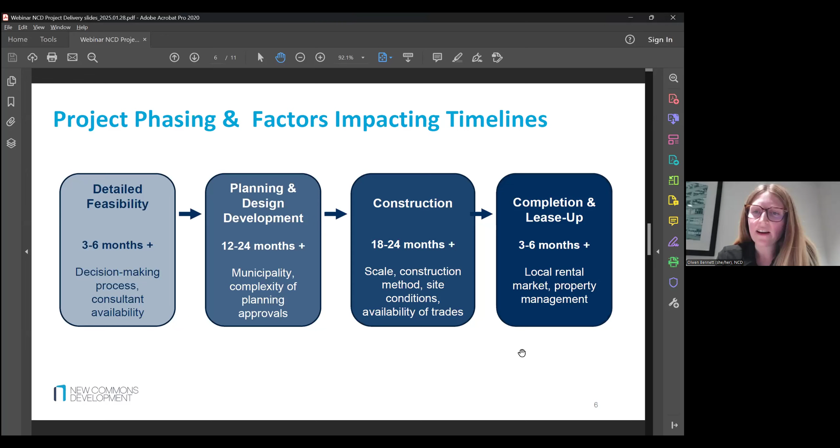And then during the last phase here, the completion and lease up, some factors that might impact timing could be your local rental market, or your property management company, your municipality also if you're looking into rent supplements and other operating subsidies.

Okay, so I'll go into a bit more detail on each of these phases. So in this early phase, this is what I call detailed feasibility, but it's really when you have made that decision to try to make a project move forward. So at this point, you've already established that you would like to try to make a project move, and you're basically getting more and more detailed on your project goals and your vision.

You're starting to narrow down on key risks and getting more detailed on that project viability. So that's working through your pro forma modeling and testing some of your assumptions. And this is probably also when you're applying for pre-development sources.

Some of those sources that Maya mentioned can help cover some of these early costs. Some groups may have some cash equity in the bank that they could put towards this early phase just to keep things moving, but that's not really common with nonprofits.

As a really high level estimated cost for this phase, we put about $50,000 to $100,000. The type of activities you'd expect here would be your early concept design, likely paying for a project manager or a development consultant. And this is also when you're hoping to do some site due diligence studies.

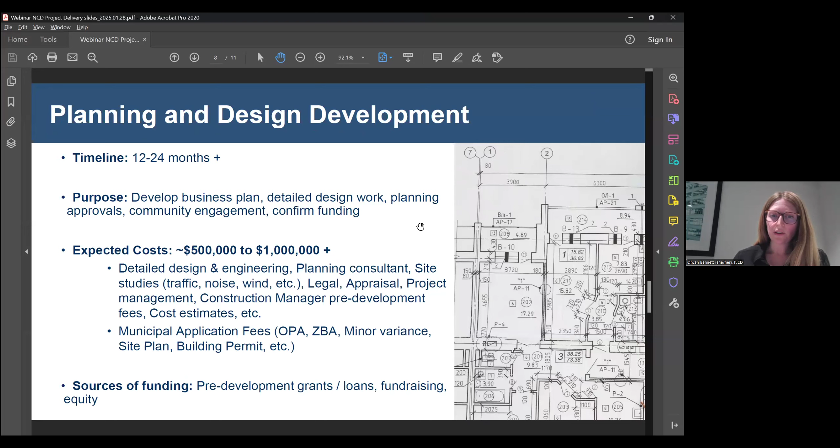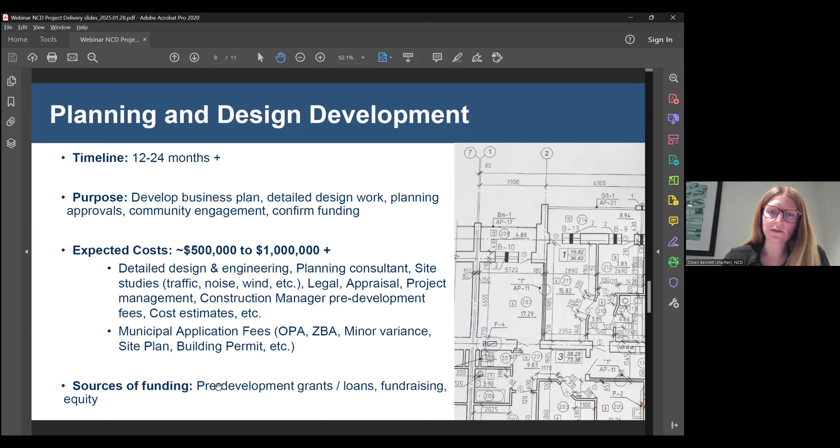And then in some municipalities, you may also have municipal application fees, which can be quite substantial. Some cities and towns will waive these for nonprofits doing affordable housing. So it's always good to look into that before you pay any fees to your municipality, to see if you can get it waived. So again, these sources of funding include pre-development grants and loans, fundraising, and equity to get you through to the construction phase.

So construction, the timeline here is 18 to 24 months plus, but actually it could be shorter or longer depending on the scale and scope of your project. There are certainly some really good ways to shorten your construction timeline, which I know Lee will talk about.

So this is really the time when you've closed on your financing, so you've got all your capital sources stacked up and ready to go, and you've signed a contract with your construction manager and you're getting your building built.

So of course the costs really depend on the design and the scale of the building, but this will include your hard costs, as Naama was talking about. So this is the actual materials and labor for the building itself, fees for your construction manager or contractor, any development charges if applicable, although Ontario now waives development charges for nonprofits, which is great. You are also going to be paying your architect, quantity surveyor, various consultants throughout construction, insurance, financing costs, and other consultants as needed. So yeah, quite a few costs at this stage.

And this is really of course when your costs ramp up quickly, but you've got all your sources stacked up and ready, so that's all good.

So let's kick off the part about planning and designing. I'm an architect and urban planner. Unlike Olwen and Maya, you will also reach out to me at a pretty early stage, but we don't cover the entire development. We do the architecture and planning part of it.

When I put this together, I reached out to other speakers. I really thought of the audience as other nonprofits that I got to work with, and I was very happy to see that this was a much more diverse audience, including a lot of developers and municipal teams. That made me very happy.

I wanted to share some of the thoughts behind the scenes. When I was thinking of what I want to say, it's less about the traditional process - yes, you will need a building permit, but all buildings do. I wanted to think about the difference between traditional market housing and when I work with nonprofits, because I sit on the board of Kehila, which is an affordable housing organization. For almost 10 years now, I've volunteered with different organizations for advocacy, so I understand nonprofit housing from a different perspective, not just as the architect.

When I was trying to really think what I could say today that will be valuable to you, I thought of three aspects that would make nonprofit housing different than market housing: the land use planning aspect, the building code things you should know, and your users. These are the three main buckets.

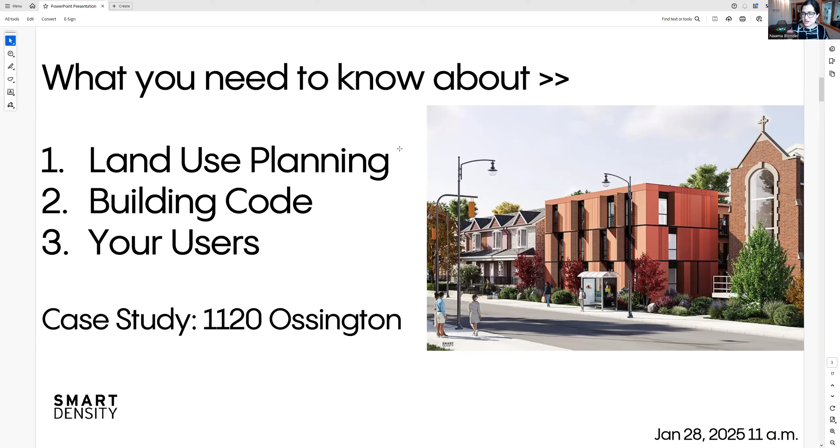You'll see me using my 1120 Ossington project as an example, a building that this week is getting occupancy, and I'm super excited about it. So I'll tell you more about it.

On the land use planning aspect, I was trying to imagine nonprofit organizations trying to navigate this process. If you're operating in a specific city, which is most of the time the case, I'd really recommend - this is Toronto, and this is the land use map. I've been reached by nonprofits in the past with different land opportunities, but the expectations of what the land allows from an official plan perspective and policy perspective, and what the city planning directs for growth and what type of growth, had a very big gap.

So if you're a nonprofit working in the same municipality you operate in, I'd highly recommend just becoming high-level familiar with the land use map. There's only one map to know, and you should be able to look at a property on the land use map. For example, here in Toronto, if I was the head of a nonprofit trying to get new housing built, you need to know two colors: basically yellow and pink or orange. If it's in the yellow, your development potential is very limited - you won't be able to get more than 4 stories most of the time. Now the city has some allowance to 6 stories, but overall that yellow is true across Canada.

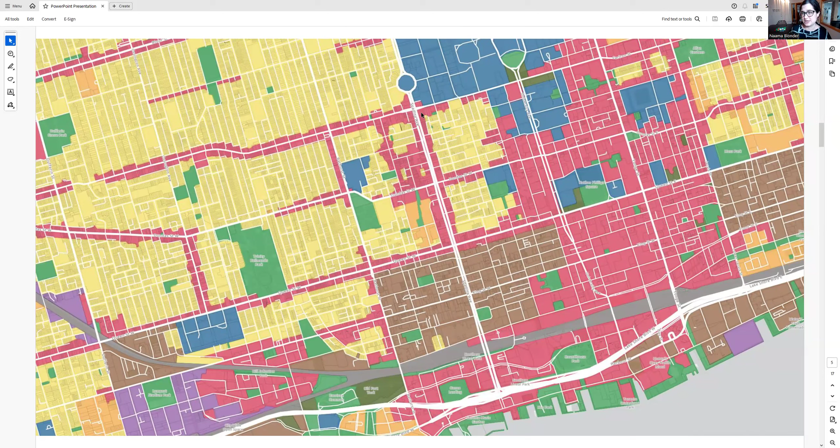Or the pink, which allows for more high density. Even if you reach out to a planner in the city - and I do believe they will be open to that - you can ask for a 10 minute explanation of what those colors mean in your municipality, and you'll be able to rapidly evaluate. I'm not talking about square footage or height, but at least if you have a vision for a mid-rise building, and I know some of you do, but you keep looking at land that will not accommodate anything more than a single family house, you're really wasting your time. So this would be one aspect of the process.

And while I'm talking about land use planning, I saw a lot of you are from municipal teams, which made me very happy, and I understand where it's coming from.

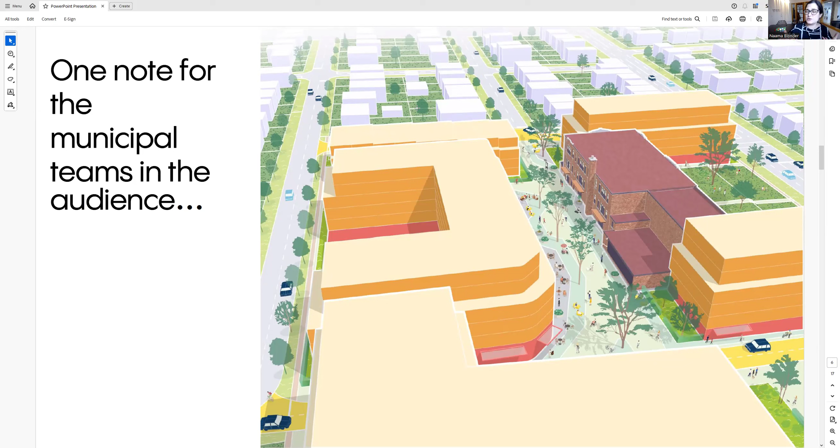I wanted to share about one request, kind of a side anecdote. I've been reviewing in the last year a lot of RFPs coming from municipalities releasing land. This is work we did for the region of Durham, about to be released. They hired us to come up with a community needs assessment, alternatives to the site, and we got the site rezoned. I've seen different ways municipalities are doing it. Once you work with nonprofits, the highest and best use of the site is not necessarily what they will build eventually, because of cost, low-hanging fruit, or whatever reasons. Not doing the work in advance, zoning the site, and just opening it to the wild west of applications means you get a wider spectrum than anticipated, and you're wasting the time of the nonprofits. I've seen it on both sides.

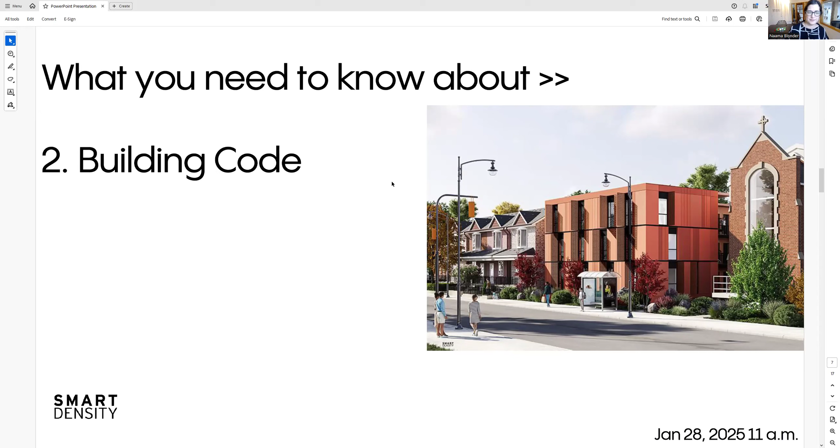Coming back to my second consideration for getting nonprofit housing built: the building code. The Ontario Building Code, giving you a very simplified version, has Part 9, which is simple, and Part 3, which is complex. The trigger between Part 9 and Part 3 is when the building is more than 3 stories in height above grade. So 3 stories and a half basement is still Part 9, but 4 stories above grade is Part 3. Also the building area, the footprint, exceeding 600 square meters, triggers Part 3.

I'm saying this because switching from Part 9 to Part 3 will have a lot of implications on your cost, from fire safety, accessibility requirements, to HVAC, mechanical and electrical systems. As I said, if I work with private sector developers, the highest and best use of the site, meaning the maximum density achievable, is most likely what the private sector developer will be after. When I work with nonprofits, from my experience, it's not always the case.

First of all, not always can they serve the tenants - if a building comes in with 100 units, not always do they have the ability and capacity to serve 100 new tenants. Or for different costing reasons, they might not be able to get the funding. So in the case of 1120 Ossington, fairly quickly we understood that the building should be under Part 9, which we designed to be 3 stories and slab on grade, to also make the construction much simpler.

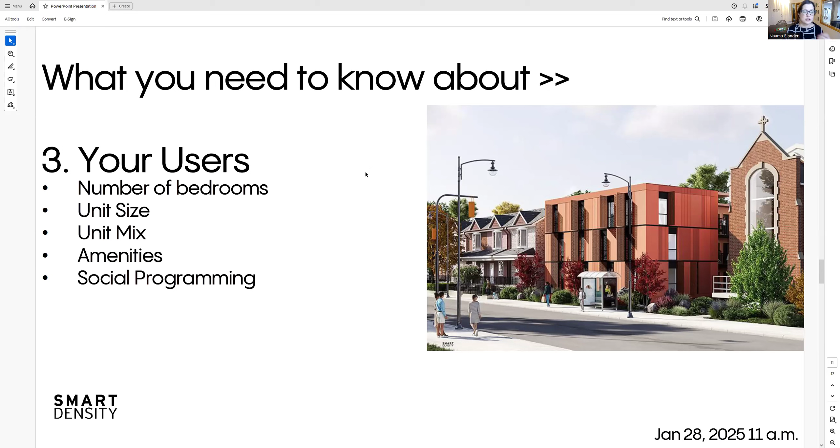Also the social programming and amenities, if you need them. So I wanted to walk you through what we have in 1120 Ossington, which is - remember I told you a few slides ago - the color, the land use designation of this property is yellow. I already know this is not going to be a fully mid-rise building, no matter even if the site was larger. I specifically didn't go into the dimensions of the site because I'm assuming that you, as an organization, will look for larger properties.

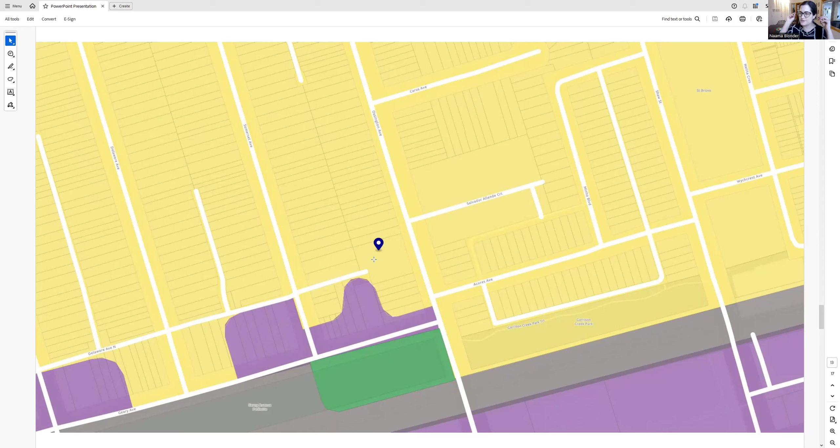So you already see, just from knowing the color, that this will be limited in height. It will need to be more in a low-rise scale.

The other thing I wanted to show you is that we had an existing building on the site. This church was already converted to affordable housing over 10 years ago, and we had an infill opportunity. This is a huge thing for nonprofits - look right under your nose. You might own land already that has surface parking or surplus land that you're just not using properly. This infill, yes, it was tight - it was a little piece of grass and some surface parking that introduced the opportunity for this infill.

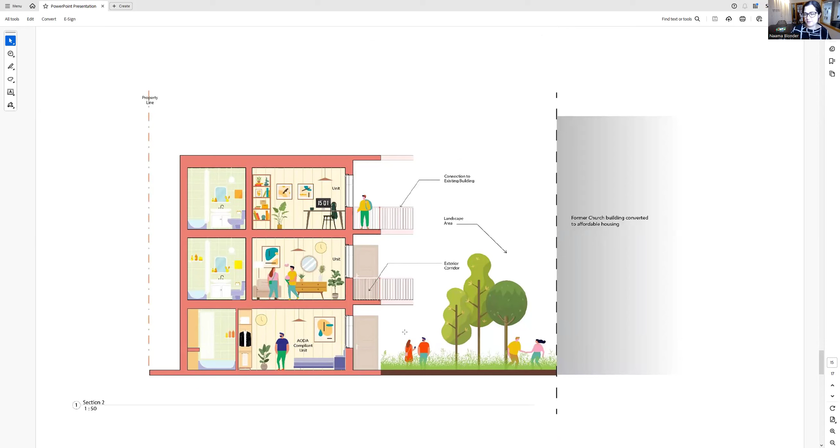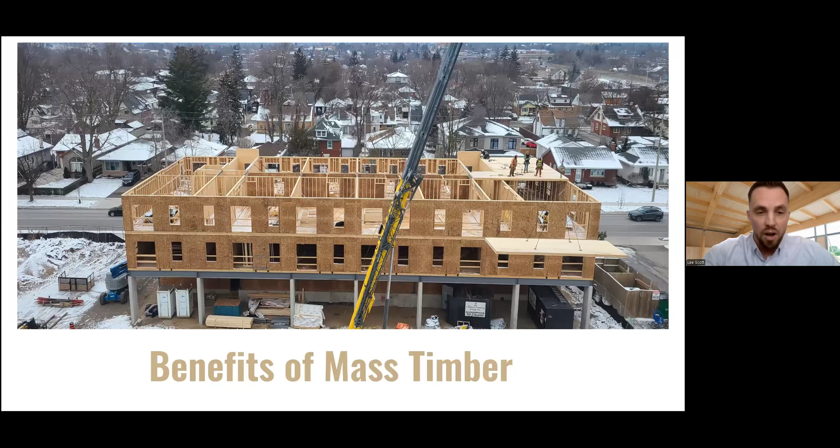The carbon equation is also a very important part of the mass timber offering for sustainability, because mass timber sequesters carbon, and it's also less carbon intensive to harvest trees and get them to site to produce the building than using concrete or steel. We're able to promote a sustainable product here, typically between 25 and 50% less embodied carbon than a conventional building.

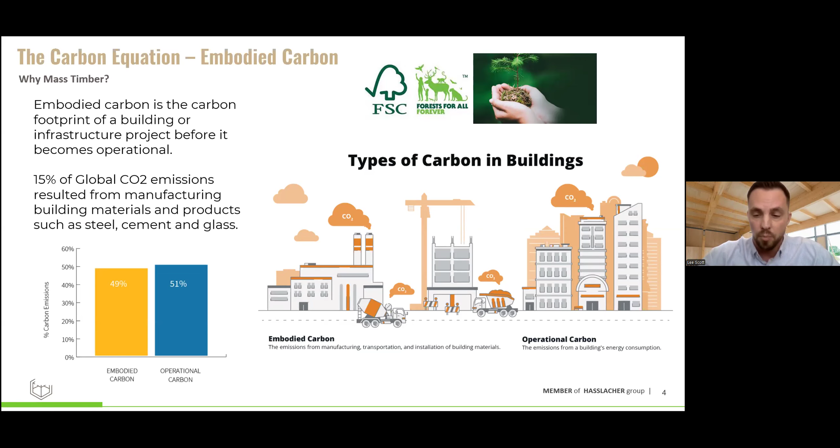The strength to weight ratio of wood is also quite advantageous. We're able to build buildings with less foundations, so less concrete in the foundations. We're able to build taller sometimes on geotechnical site classes that wouldn't sustain a concrete building. That implies less soil remediation needed and increased seismic performance.

We're also able to add stories to existing buildings. This is a great example we just completed in Peel region, where we added 2 stories to an existing concrete building. I think that's something we'll try to utilize more and more as it comes up.

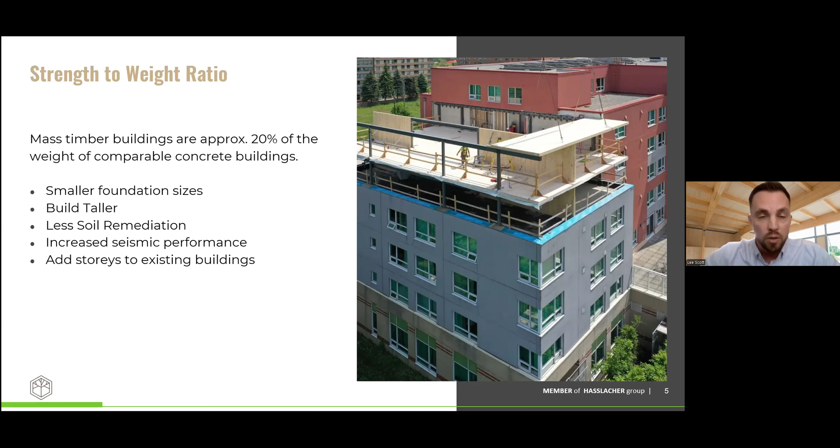Probably one of the most tangible benefits of mass timber is saving on the construction schedule. If we're planning these projects properly, as site work is going on and concrete foundations are being done, we're actually manufacturing the building offsite in our facility - basically building a digital twin of the project right down to the last screw. All the mechanical, electrical, plumbing penetrations are coordinated beforehand and cut in our factory, so trades get to site with less decisions made on site, less site instructions, less RFIs, a little less bureaucracy, and are able to fit out the building extremely quickly.

There's also a lot less formwork and shoring. It's a very clean and quiet site, which enables the trades to get in there very quickly and fit out the building. Obviously, there's less interior finishes as well.

If you're leaving the wood exposed, that's a huge benefit for less drywall and other finishing crews on site, which take time. Those overall construction savings translate into interest savings. They translate into generating revenue quicker when you're getting the building leased up and your tenants in there quicker. Less general condition expenses for the site, and you've got less equipment rentals.

So you're not just looking at material costs when you're comparing mass timber to other approaches. You really have to look at the project holistically and add up all of those additional savings to get a true value of what the mass timber project is costing compared to other approaches.

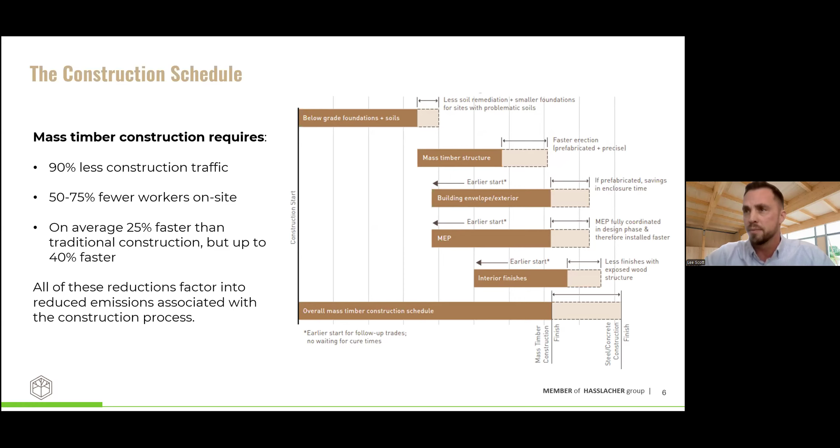So Element 5, we are located in St. Thomas, Ontario. We have an office downtown Toronto, but our manufacturing facility is down in St. Thomas. When we started, we broke ground on this in 2019. It's a 140,000 square foot facility. We have 2 fully automated production lines in the facility, one for CLT. We make about 50,000 cubic meters of CLT per year, which translates into about 2 million square feet of floor plate when utilizing a 5-ply standard CLT floor plate.

Our glulam production, which complements CLT quite well for a mass timber offering, was on the lesser side, about 5,000 cubic meters. That actually pushed us to either buy off the market or work with some European manufacturers.

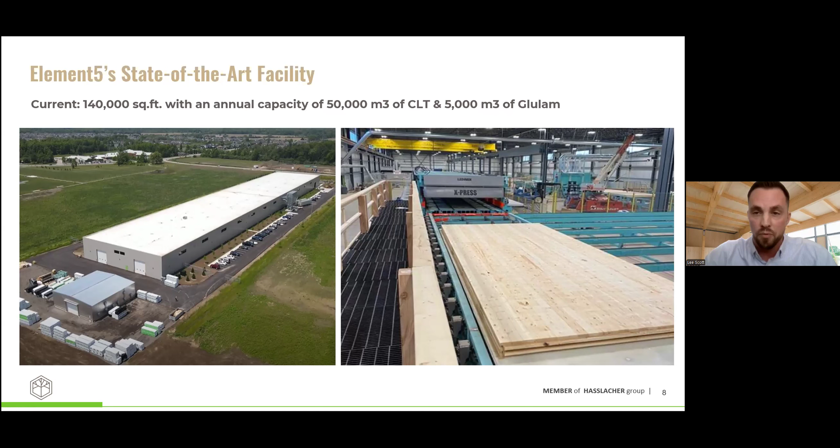So that developed a relationship with Hasslacher. Hasslacher is an Austrian firm, a family-based company started in 1904, highly regarded as one of the best mass timber manufacturers in the world. They have 14 factories over in Europe, and they've made a significant investment in Element 5 for our expansion that is going on right now.

So we're taking our current 140,000 square foot facility and we've added significant square footage to it. We're putting a mass timber office on the front. We're adding additional areas for CNC, so that's actually cutting up the panels and the glulam beams that we're making. Some extra room for shipping, and we've added a lumber grading and sorting facility that you see there in the back.

It's about a 50,000 square foot building. It'll just be taking the commodity lumber that we get from our mills and sorting it and regrading it to get more utility out of the lumber that we're getting. Hopefully that translates into cost savings for our customers.

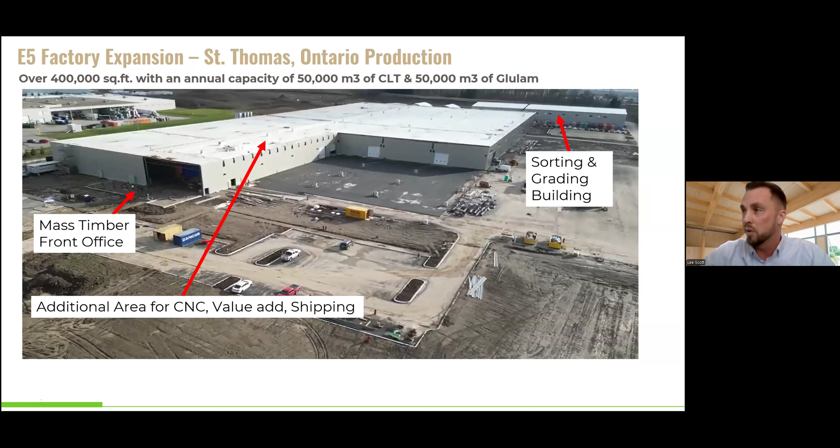And we've added a new glulam line, taking our glulam production from about 5,000 cubic meters per year to 50,000 cubic meters per year. So a very highly evolved, high volume, high capacity glulam line going in right now, and we're going to be making some of those glulam beams very shortly here.

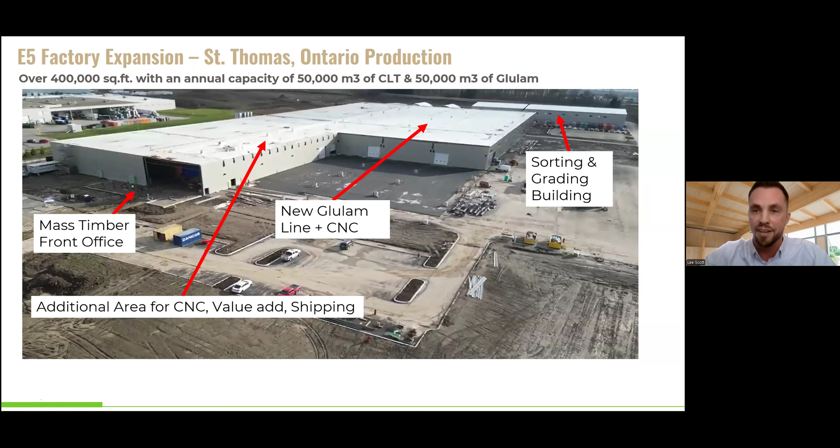Pretty exciting. We've also added this mass timber canopy and storage area, and you can see the beautiful glulam beams that we brought over from Austria. Some of these beams are about 60 to 80 feet long and up to 9 feet deep. They're a specialized fish belly beam to help with this covered canopy area.

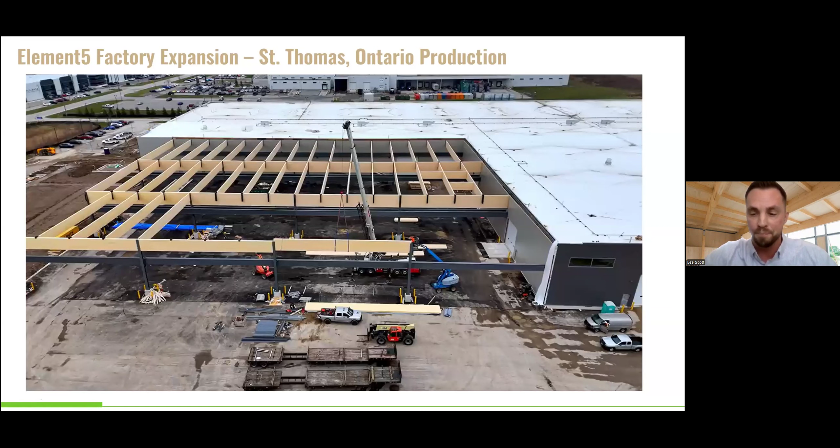So we've gone from 140,000 square feet to about 400,000 square feet at the St. Thomas facility, making us one of the largest mass timber manufacturing facilities in North America. Exponential growth in the industry, exponential growth at Element 5, all fueled by a great design community and people's affinity to have these healthy spaces for clients.

So what can we build and what should we build? We want to be very careful about our approach here for mass timber. The Ontario Building Code allows us to go up to 6 stories and pretty much fully expose the timber. At 6 stories and below, we usually fall within a 1-hour fire rating, and typically the mass timber will achieve that 1-hour fire rating inherently. It's not the structurally governing factor, so it's very easy to design within a 1-hour fire rating with our products.

When you go beyond 6 stories, it's an important threshold to consider. Some developers want to really maximize the proforma, and maybe they want to go from 6 to 7 or 8 stories. We can do that, you just have to really consider the structural design approach, because now fire probably is governing, and the code changes a little bit where it dictates that you need to encapsulate most of that mass timber with 2 layers of Type X drywall. We can expose it, but you're going to go through an alternative building solution with the authority having jurisdiction, which is not a huge onerous process, but it is just something to consider.

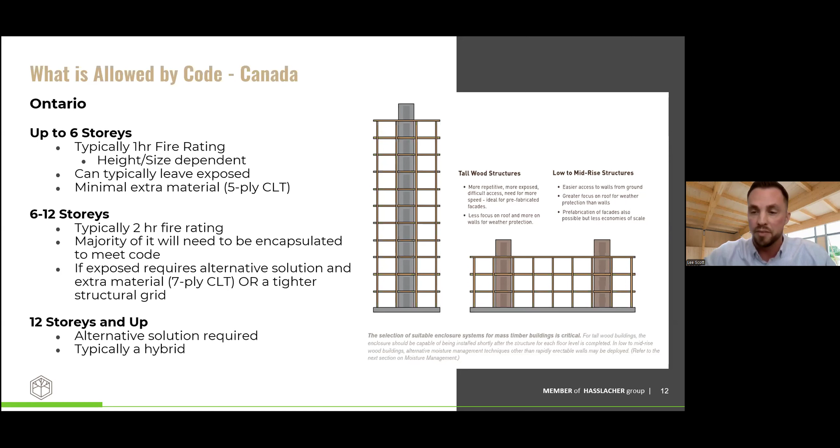In Ontario, we can actually go up to 12 stories now, and we're happy to say at Element 5, we've got some 12-story buildings coming up under contract that are quite beautiful.

One of our first affordable housing projects was the Blockline Road project in Kitchener. It's about a 23,000 square foot, 41 unit women's shelter with the YW. We had an all-CLT approach, so the facade is CLT. Those are 4-story tilt-up panels with punch windows. The whole facade envelope on that building went up in about a day and a half.

The whole structure of the building went up in just 18 days. We built a sister building to it, which is 3 stories. It utilizes the same structural grid and structural approach, but only 3 stories. That building went up in just 9 days, so the trades were able to get in there and fit it out. I think on this building we went from concept design to occupied in just over 13 months - a very aggressive, fast construction schedule, supported by how quickly these timber buildings go up.

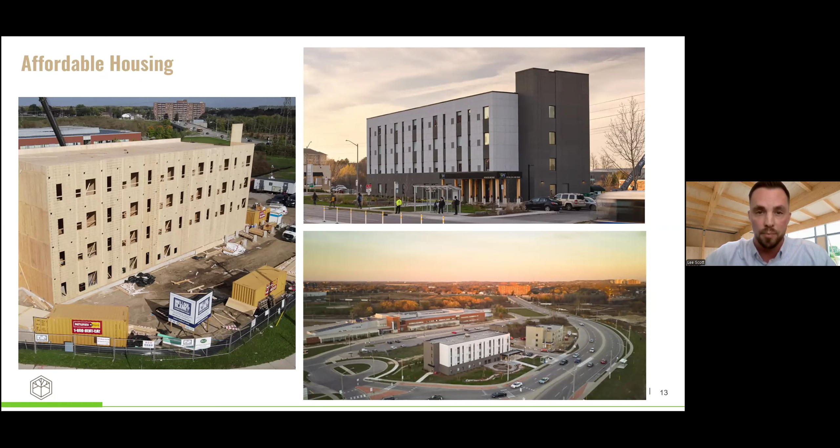Here's a closer look at the 3-story building. You can see the panels for the floor plates - those are 5-ply CLT panels, and they span 2 structural bays. We like to design in a structural grid that's important - if we can get a 2-span continuous panel, about a 10-foot wide panel by somewhere between 36 and 40 feet long, that's what enables you to put up that floor plate so quickly. You can see here the elevator cores, stair cores, unit demising walls - everything on this building is CLT.

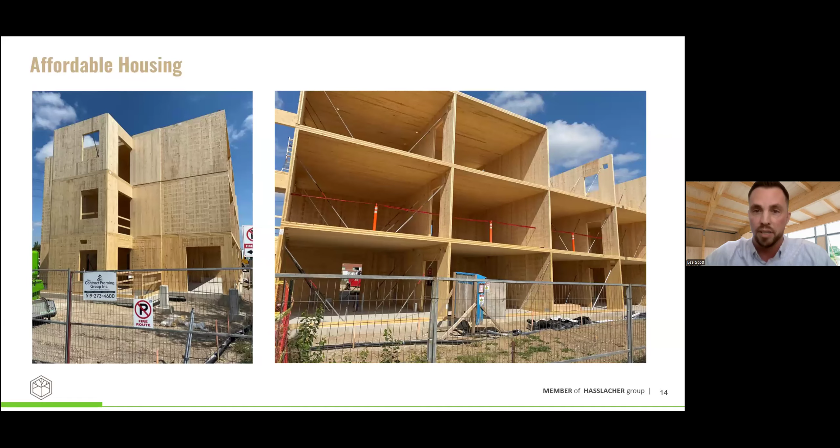For one of our subsequent projects after that, we took the same structural approach, went down to 3 stories, and built this passive house building in East Gwillimbury. We were able to get a building permit set and structural drawing set very quickly, because we were utilizing the previous work we'd done on past projects and maintaining that same modular structural grid approach - the same approach we've used in Hamilton.

We just topped out earlier, late last year I guess, on this 6-story building. Again, this utilizes that same really efficient structural grid, but going up to 6 stories. Some of the connection design changes because of the lateral force resisting system - you get a bit more wind and seismic forces to deal with. But again, just harnessing that same approach for design and having it as efficient as possible, with typical bays all the way up, to really keep costs down for the timber approach.

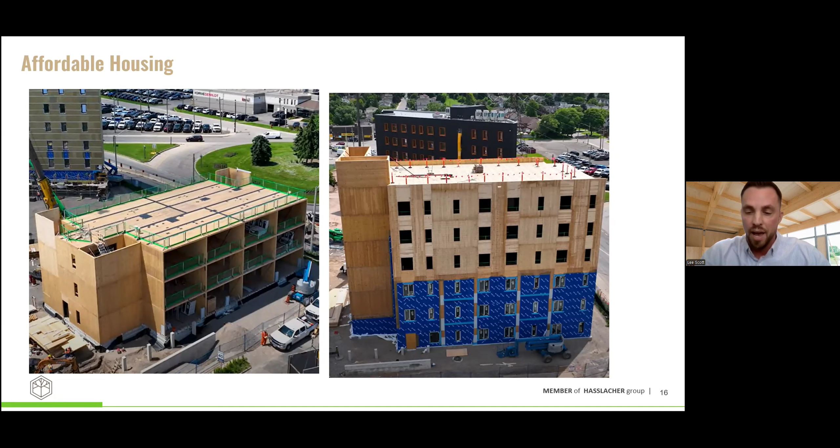There are a few different ways to get mass timber in your building. It doesn't have to be a full mass timber building, and sometimes utilizing different products for different uses is the right approach to really sharpen the pencil and get a cost-effective building. What we've seen recently on a lot of projects is utilizing prefabricated stud walls - light wood frame walls - as the vertical structure, those load-bearing walls, while still utilizing CLT as the floor plate. Cross-laminated timber is extremely efficient as a horizontal floor plate and roof plate, and you're still harnessing a lot of the value of mass timber.

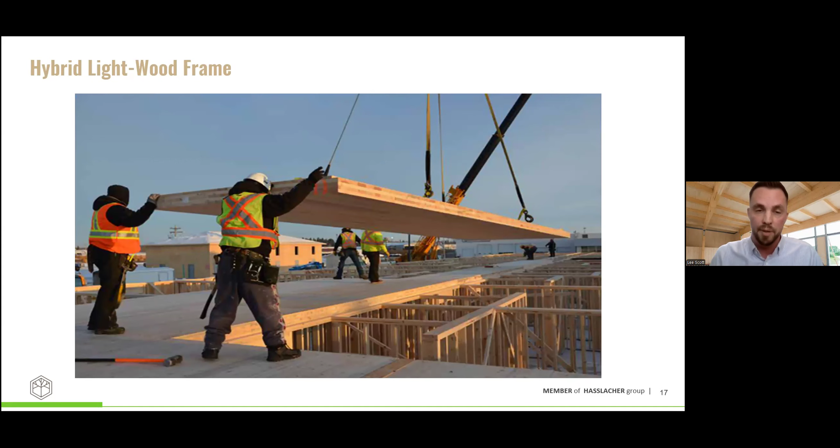You're still getting massive panels, so 10-foot by 40-foot panels being put in every 15 minutes with a crane. If you're putting 400 square feet in every 10 to 15 minutes with a crane, a crew can easily put 10 to 15,000 square feet of floor plate in a single day. Now if you're utilizing a stud wall system, it's maybe saving you on material, but it's still prefabricated off-site, so you're not losing any of that rapid install, and it's also a little bit easier to run your mechanical and electrical through the stud wall - kind of getting the best of both worlds.

I really like this approach. We've done it on the Franklin Flats project in Kitchener with the Maxwell Building Consultant firm and ABA Architects. These are 4 buildings - the first one we did...

The construction developer wanted a data point, since he'd never done mass timber before. They left the roof as conventional TJI joists, and it took them 10 full working days to put on the roof. Every other mass timber floor plate was 1 day, and then they were standing walls the next day. So they could really see the benefit of the construction schedule savings by switching from TJIs to mass timber. Although TJIs are a little bit cheaper than a CLT panel, that construction schedule savings translated into a really cost-effective project, and that developer we've done several more buildings with since.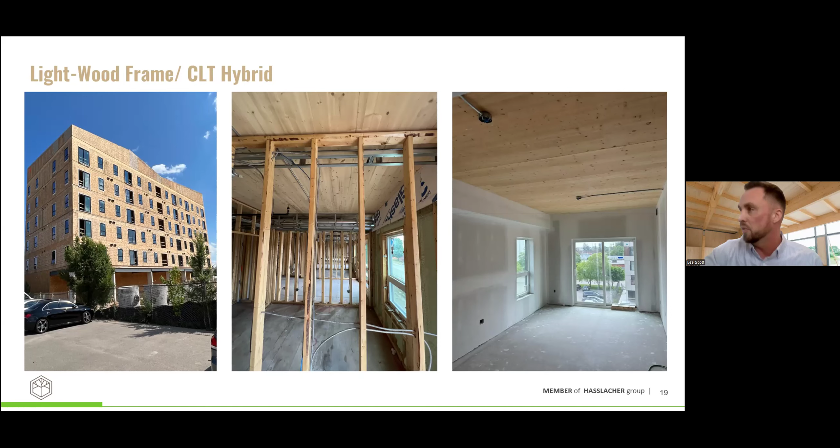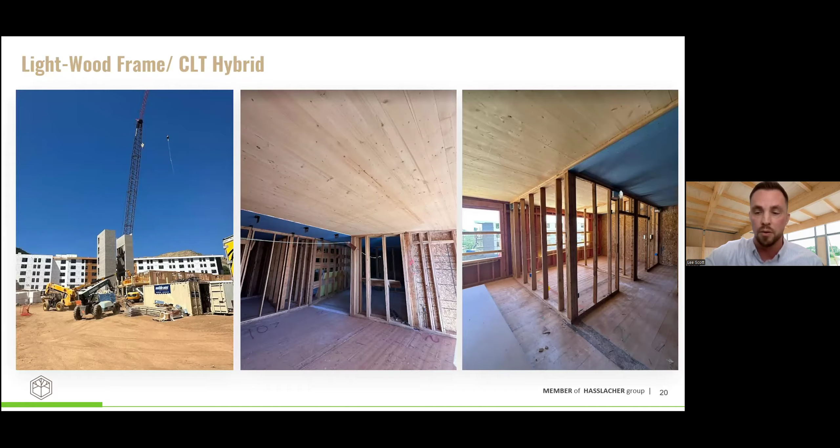We've taken this approach into student housing. We put up 4 buildings in Golden, Colorado, about 300,000 square feet, simultaneously with this lightwood frame CLT hybrid approach, and it's worked extremely well. So really utilizing the best of both worlds for materials, working out for us.

Some of the major design considerations you really want to consider are the structural grid. Unlike concrete or steel, when you get outside ideal design parameters for mass timber, the cost can go up exponentially. So it's really important to lock down your structural grid and be fully utilizing the most cost-effective panel for your manufacturer. For Element 5, a 175 millimeters, so about 7 inches thick floor plate at a V2 grade SPF, so we utilize spruce, Ontario spruce, is a really cost-effective way to design your floor plate. And you want to have an even number of structural bays, so we're always in that 2-span continuous condition.

So architecture is very important, but really working the architecture around an ideal structural grid is the most important way to have a cost-effective mass timber product.

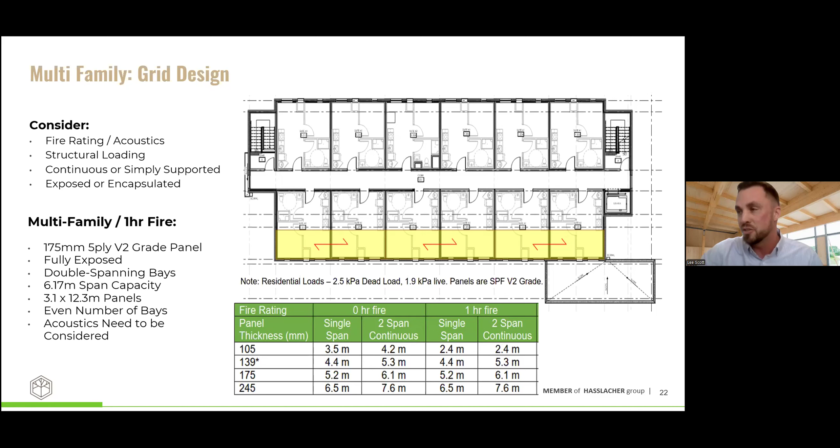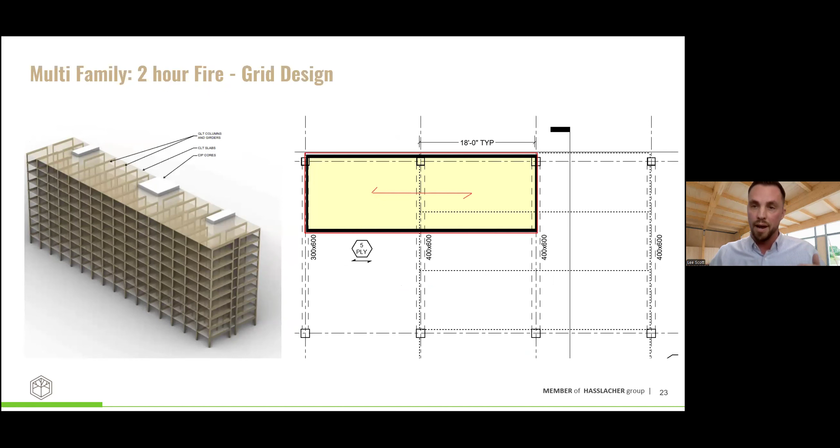So this is the ideal structural grid for a 1-hour fire rated building. If you want to go to 2 hours, we can do that, but we may need to shorten the structural grid a little bit and increase the strength grade of the CLT if we want to leave that exposed. So like I said, it's that threshold between 1 hour and 2 hours that you really need to consider early. So the goal here is to have an adaptable approach where we can take that same structural grid and really fit it to the site constraints to get the most out of the site.

So Element 5 products and services. We're a full service firm. We like to come in early and really help the architect and engineer of record and the whole consultant team with our feedback and knowledge and experience, so you're getting the most cost-effective building.

Also, that helps with scheduling and working within our lead times to make sure that we're planning properly so that when that concrete is finished, we can swoop right in and start erecting the timber on site. So we've got a great team of design consultants, cost consultants to help you with budgeting, early design considerations. We can come on as a design assist partner to really streamline the whole process.

We have full mass timber engineering. We have about 18 structural engineers on staff now, but we're not here to be consultants, we're here to just empower the project to be successful. So typically we end up with some delegated design for connections, or we can help out with member sizing or the lateral system. All of these things get us ready to manufacture the building, and then we work with our preferred partners to erect it.

As I was saying, our CLT panels come in all shapes and sizes, but really just rectangles. So when you deviate from a rectangle, you can create some wastage. So just understanding the geometry of the building is important to keep it cost effective, and just working within your manufacturer's ideal strength grades and sizes.

We make our panels up to 11.5 feet wide, but really for shipping, you want to keep it around 10 feet wide to keep your shipping costs down. And we make our panels up to 52 feet long, and they go anywhere from 3.5 inches to all the way over a foot thick.

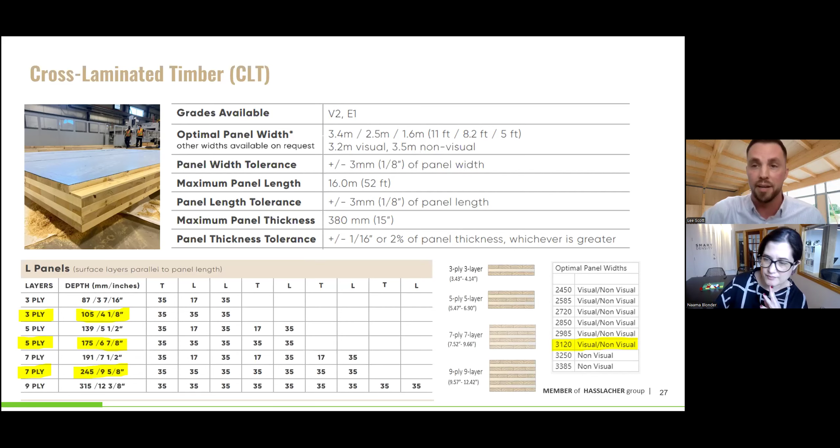Glulam is another component. We're expanding on our Glulam lines. We're going to be offering spruce pine Glulam as well as Douglas fir in all shapes and sizes, just rectangles again, really.

And some of our services, we can come in and help with the structural detailing, 3D modeling. Like I said, we're building a digital twin of the building, working with the consultants and presenting that design to everybody to make sure all the mechanical penetrations, electrical and plumbing are all in the right spot. So then when it gets to site, everything fits together perfectly.

Once we have those approved shop drawings, we are going to fabricate it at our building in St. Thomas and start marshaling it to site in the correct sequence, working with the installer to make sure it's going up as efficiently as possible.